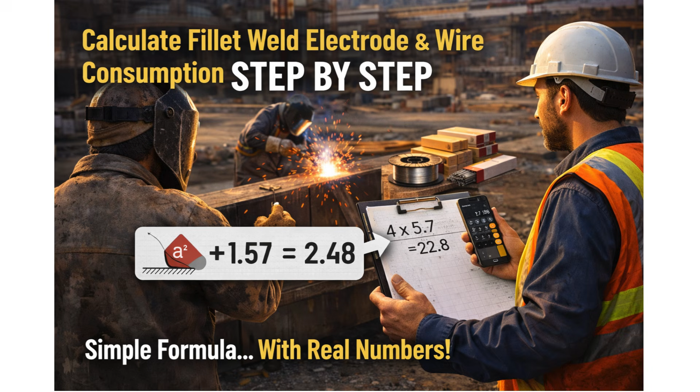Every welder and engineer on a construction site faces the same question: how much electrode or wire do I actually need for this job? Get it wrong, and you're either running out mid-job, or wasting thousands on unused consumables sitting in the store. In this video, I'm going to show you the exact method we use on site to calculate fillet weld electrode and wire consumption, step by step, with real numbers.

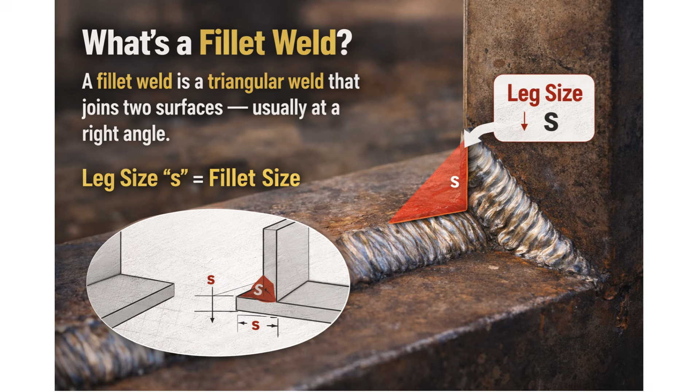No complicated software, just a simple formula you can do on your phone or clipboard. Let's get into it. Before we calculate, let's quickly define what we're dealing with. A fillet weld is a triangular weld that joins two surfaces, usually at a right angle. The most important measurement is the leg size, also called the fillet size, usually noted as S on engineering drawings. This is what drives your consumable calculation.

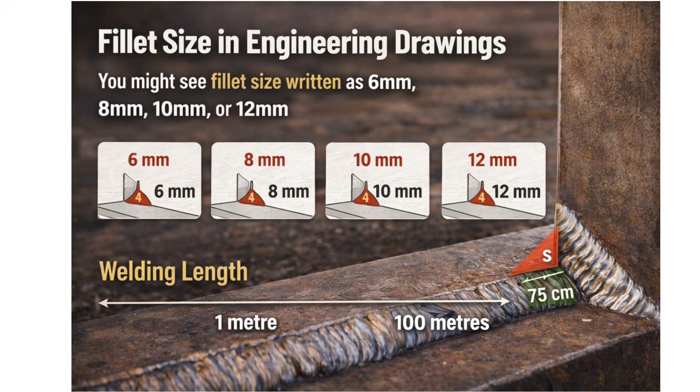On your drawings, the fillet size might be written as 6 mm, 8 mm, 10 mm, or 12 mm, whatever the engineer has specified. And the length, that's simply the total run of weld you need to deposit. Could be 1 meter, could be 100 meters. We'll use that in our formula. Step 1 is to find the volume of weld metal. For an equal leg fillet weld, the formula is beautifully simple. V equals 0.5 multiplied by the leg size squared, multiplied by the weld length. This gives you the volume in cubic centimeters, assuming you enter the leg in centimeters and length in centimeters.

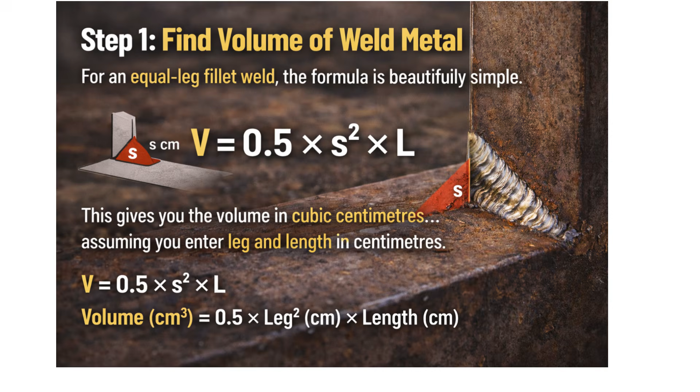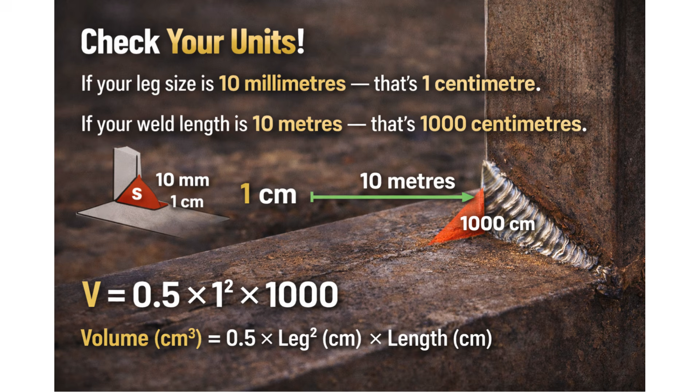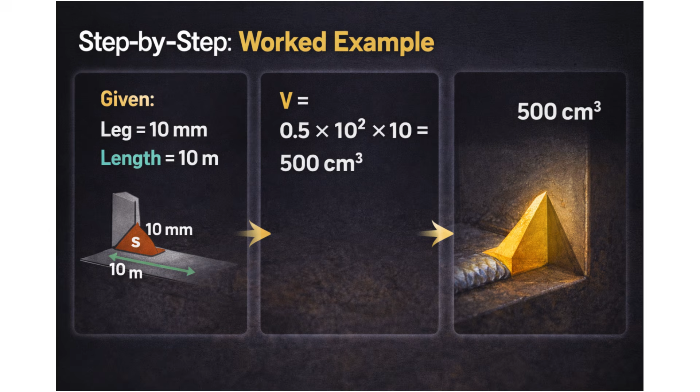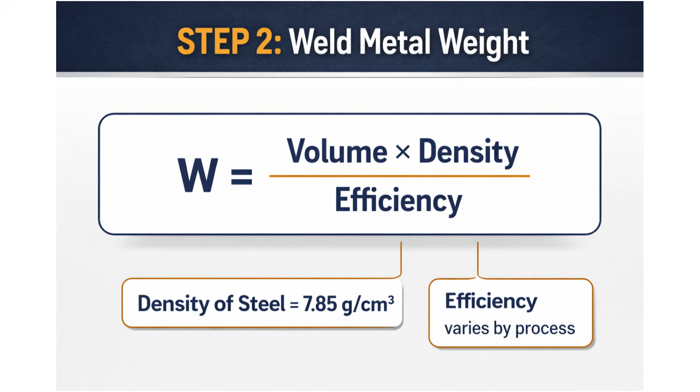Step 2 is converting that volume into actual weight, because you buy welding consumables by the kilogram, not by volume. The formula is weight equals volume multiplied by density divided by deposition efficiency. The density of steel weld metal is a constant, 7.85 grams per cubic centimeter. But the efficiency? That depends on your welding process. Let me explain deposition efficiency. When you're welding, not all the electrode becomes weld metal. Some is lost as spatter, slag, and fumes.

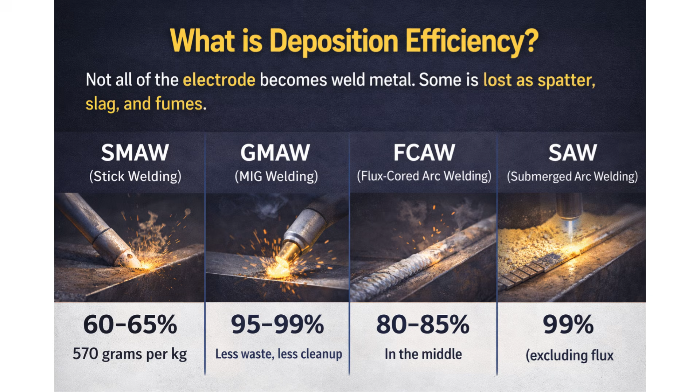SMAW, stick welding, is the least efficient. Typically 60 to 65%. So for every kilogram of electrode you use, only about 570 grams actually ends up as weld metal. GMAW, MIG welding, is much more efficient. 95 to 99%. Less waste, less cleanup. FCAW, flux cored arc welding, sits in the middle. 80 to 85%. And SAW, submerged arc welding, is the most efficient at 99%, excluding flux.

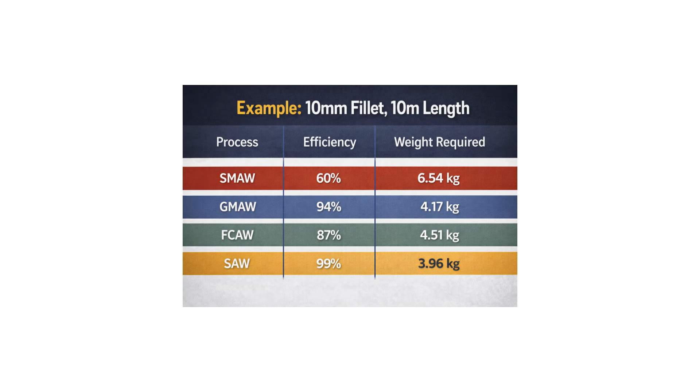Almost no loss. Using our example, volume is 500 cubic centimeters, density is 7.85 grams, let's calculate the weight for each process. SMAW at 60% efficiency, 500 times 7.85 divided by 0.60 equals 6.54 kilograms. GMAW at 94% gives us 4.17 kilograms. FCAW at 87%, 4.51 kilograms. And SAW at 99%, 3.96 kilograms.

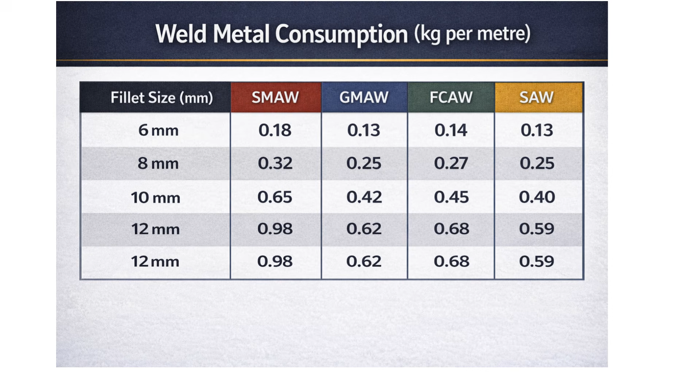Now here's the real gold, the ready reckoner table. This shows you weld metal consumption in kilograms per meter for 4 common fillet sizes. For a 6 mm fillet with SMAW, you need about 0.18 kilograms per meter. For GMAW, it's only 0.13 kilograms per meter. Jump to a 10 mm fillet, SMAW needs 0.65 kilograms per meter, GMAW needs 0.42 kilograms per meter. This table alone can save you hours of calculation on site. Screenshot it, print it, pin it in your office.

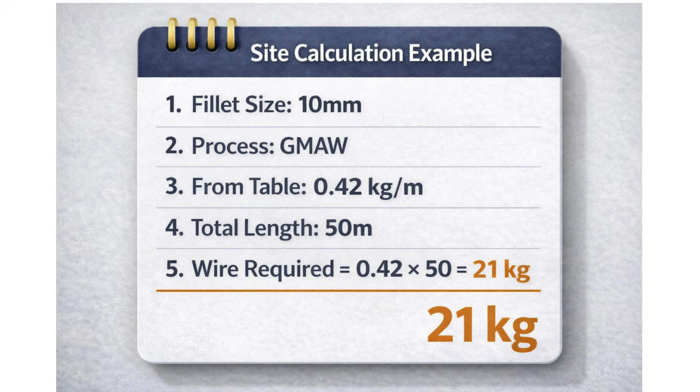Let's work a quick example with the table. You have 50 meters of 10 mm fillet weld to do with GMAW. How much wire do you need? Simple. 0.42 kg per meter, multiplied by 50 meters, equals 21 kilograms of wire. Done. That's your purchase order quantity. And finally, the quickest method of all. Thumb rules. These are simplified formulas that give you a fast estimate without needing the table.

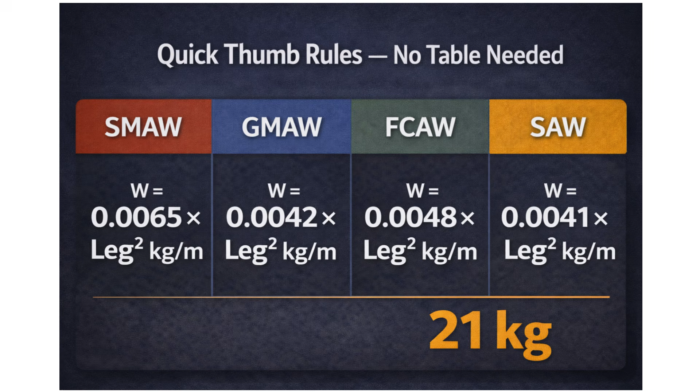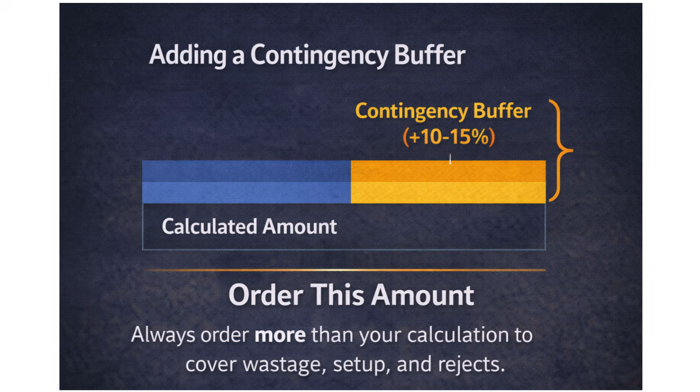For SMAW, weight equals 0.0065 times leg size squared. For GMAW, 0.0042 times leg squared. FCAW, 0.0048. SAW, 0.0041. So for a 10 mm fillet with GMAW, 0.0042 times 10 squared equals 0.42 kilograms. Exactly what the table shows. These thumb rules are perfect for a site walkthrough, a cost estimate meeting, or when your phone battery is dead and you just need a number. They're accurate enough for planning purposes. Always add 10 to 15% as a contingency buffer when placing your order.

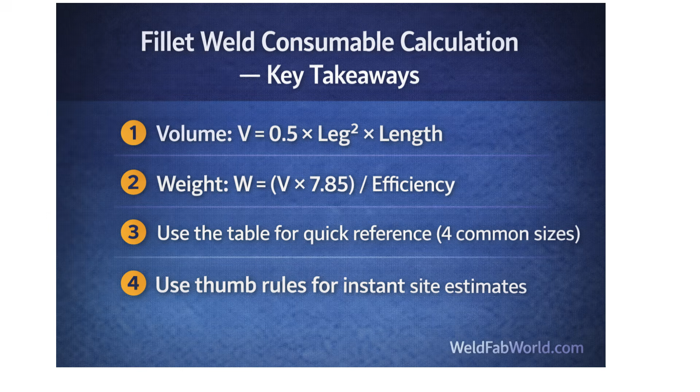So let's bring it all together. You now have a complete, practical system for estimating fillet weld consumables on site. Step 1. Calculate the volume. Step 2. Calculate the weight using density and efficiency. Step 3. Use the ready reckoner table or thumb rules for speed. Whether you're doing a full material takeoff or just a quick sanity check, these methods work.